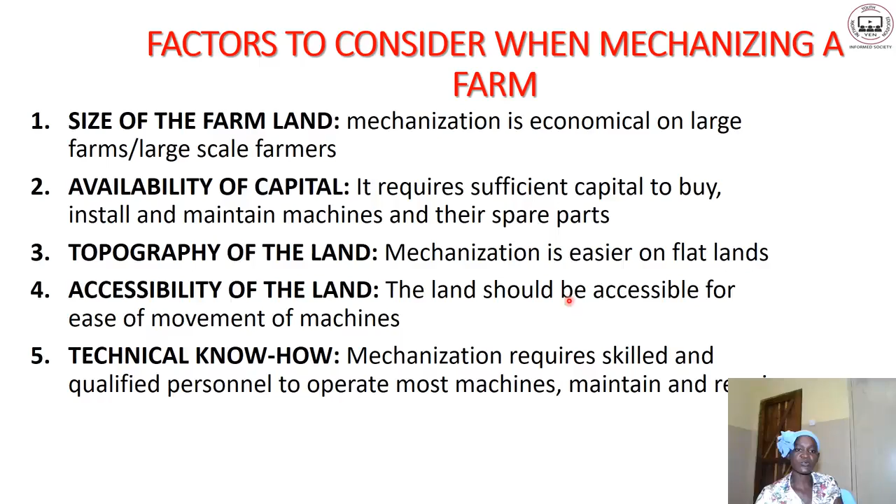may impose things which are not even supposed to be used. So it is very, very important, when you are mechanizing a farm, there is a need for some skills as well as qualified personnel so that they can operate those machines.

Apart from that, value of the crop is also another factor we need to consider. High-value crops can be mechanized since they are able to recover the cost of mechanization. As I've already mentioned, most farm machines are very, very expensive. So you cannot use those expensive machines for activities in an amaranthus field, bonongwe. We know those types of vegetables are very, very cheap when it comes to selling them.

Of course, you may have a huge field, but as long as you are going to plant, let's say, amaranthus, then you hire a machine to clear the land, to till the land or to make some beds, even to plant. Definitely you may not be able to recover the cost of mechanization.

So make sure that if you are going to grow valued crops, you can mechanize, bearing in mind that once you sell your crop, which is of high value, you're going to recover the cost of mechanization. Apart from that, we can also consider market demand.

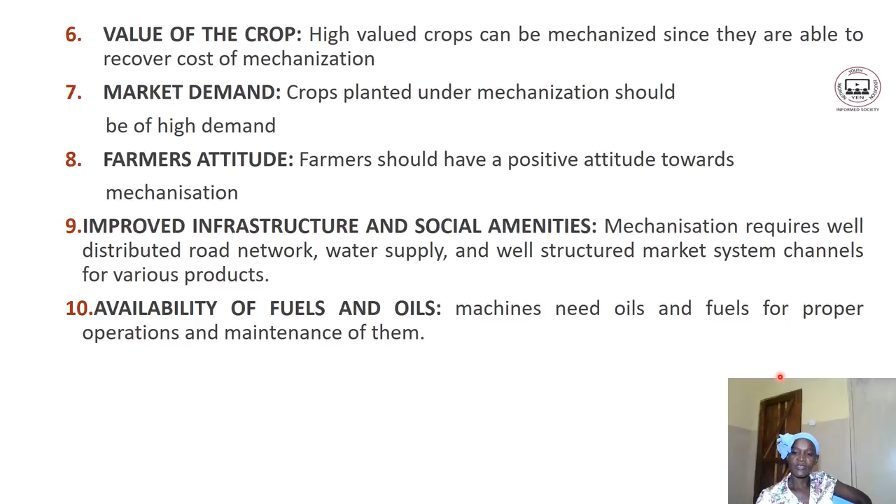Apart from that, it will depend on availability of fuels and oil. For those machines to be used, you need oils and fuels for proper operation and maintenance. You remember at one point in time here in Malawi, we ran out of fuel. It means that at that time mechanization was impossible. So mechanization can be impossible in countries where they run out of fuel, just because those machines cannot be used if there is no fuel.

Then availability of labor is also another factor we can consider. It is very, very important that there is sufficient labor on the farm to perfect the work done by the machines. As I've already mentioned, you need qualified personnel to operate those machines. So if they are not there, it will be impossible to use those machines. So it will depend on the availability of qualified personnel.

Apart from that, it will depend on land tenure system. Some land tenure systems will prevent combining farms to create bigger farm holdings. We have mentioned earlier that in order to mechanize, you make sure that you are mechanizing large farms. And here in Malawi, with this high population increase, we are running short of land. Most of the times, families cultivate on small pieces of land.

But still, we can mechanize as long as we combine those small farms and create a bigger farm or holding, so that each and every farmer may contribute to the cost of the machine if it is hired. But there are some land tenure systems which will prevent doing so. So it will depend on the land tenure system.

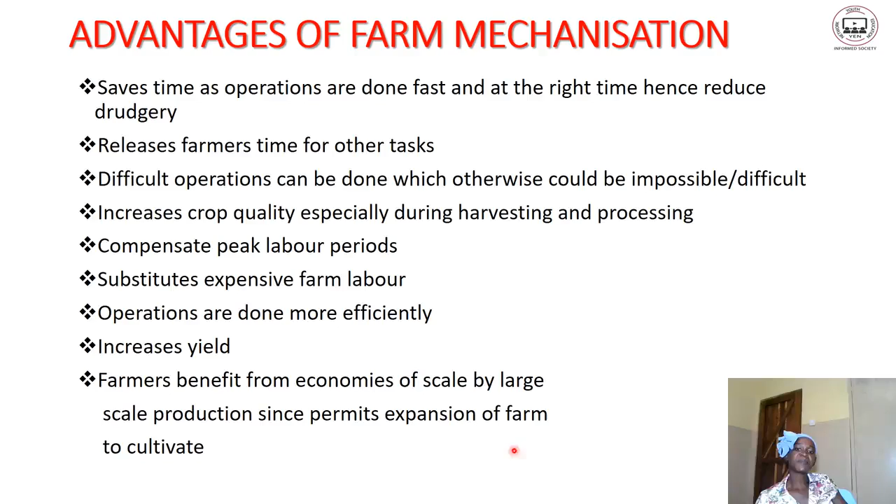Even though farm mechanization has several benefits, it also has some limitations. Some of the disadvantages are as follows. Number one, it creates unemployment. For example, unskilled labor may not be required if you are mechanizing a farm; you only need skilled labor. Therefore, people will be migrating to cities and towns in search of work. So in a farm where you may employ 10 people to do some of the operations, you may only employ one qualified personnel. So in that case, it creates unemployment.

Apart from that, quality of work may be compromised due to speed of operation. Farm mechanization, as already mentioned as an advantage, is very fast. But that speed may compromise the quality of work. And also, capital and operating costs are very high, making it very expensive. So, in short, farm mechanization is very expensive. It requires high capital.

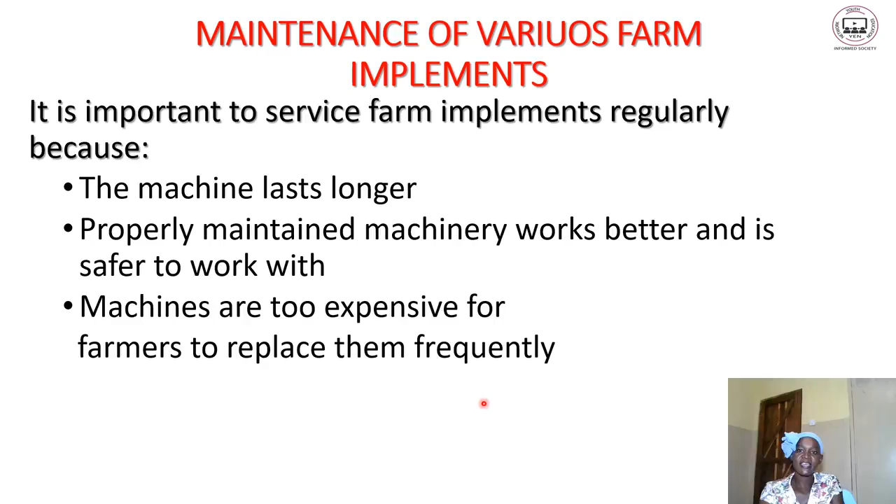The panga: replace, sharpen, and oil the blade if the handle is broken, blunt, or dry. Apart from that, clean the panga after use. The wheelbarrow: grease the wheel axle to reduce wear and tear, and it is important to paint the wheelbarrow to prevent it from rusting.

The sprayer: make sure that you clean and dismantle the nozzle and the tank thoroughly soon after use with clean water to prevent corrosion by chemicals. Painting the knapsack sprayer during the off-season is also essential.

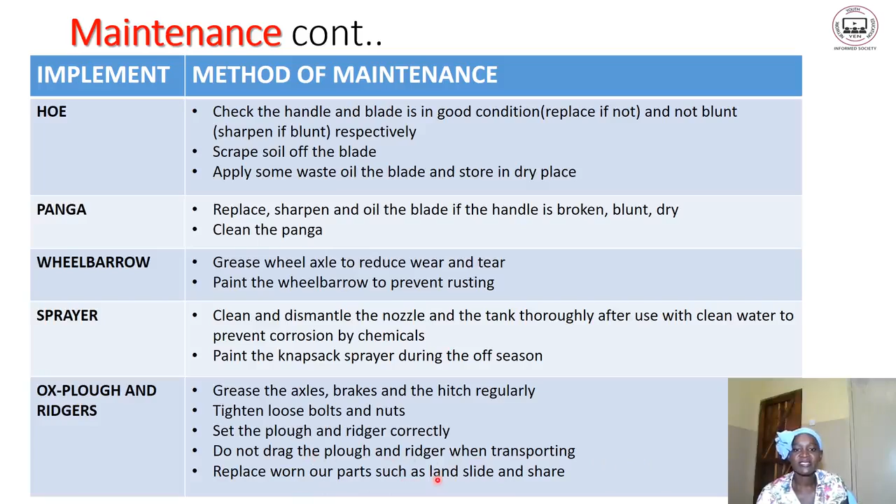The ox plow and the ridger: grease the axles, brakes, and the hitch regularly. Tighten loose bolts and nuts before use. Set the plow and ridger correctly. You should not drag the plow and ridger when transporting. Replace worn-out parts such as the landside and share.

The ox cart: grease the wheel bearings and nuts, tighten loose bolts and nuts, and replace worn-out parts. Make sure that you check the tires are at the correct pressure, and do not overload the ox cart to prevent it from overturning. Make sure you paint the ox cart and store it in a shed to prevent rusting.

The harrows: make sure that you tighten all bolts, U-bolts and nuts, replace worn-out parts, and grease the bearings and the harrow when not in use to prevent it from rusting. Check that the teeth are securely placed and sharpen blunt tines or points. Painting is also necessary to prevent it from rusting.

The disc plow: tighten the bolts and nuts, grease the bearings and paint the beams, replace worn-out discs and scrapers. Make sure that you clean and sharpen the discs and check and adjust the scraper.

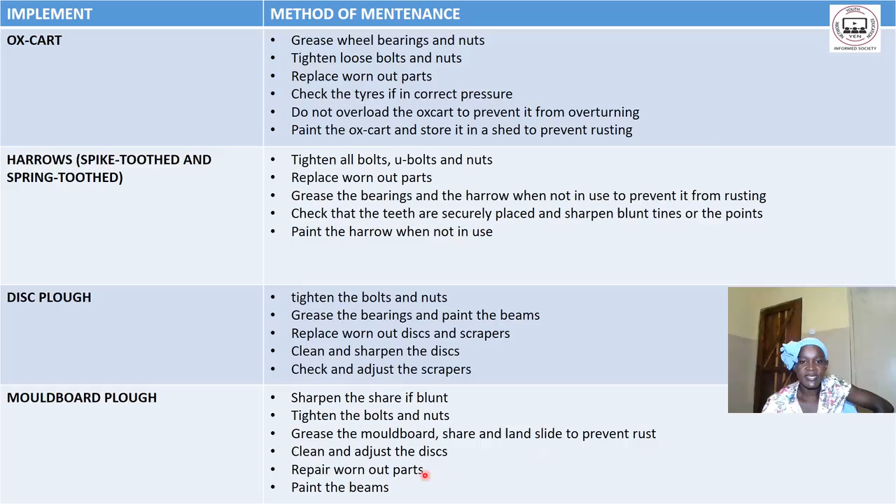Moldboard plow: make sure that you sharpen the share if blunt, and tighten the bolts and nuts. Grease the moldboard, share, and landside to prevent rusting. Clean and adjust as recommended. Repair worn-out parts and also paint the beam.

Some safety measures when using farm machinery should be observed. You should read the operator's manual that accompanies implements and machines before using them, so that you use them as expected. Do not wear loose clothes when operating the machines, otherwise accidents may be inevitable. Do not leave the machines running unattended; make sure that there is qualified personnel near the running machine.

Wear protective clothes such as overalls, masks, gloves, and boots, especially during spraying. Do not smoke, drink, or eat when spraying, otherwise you may consume some chemicals. Avoid spraying against the wind to prevent being splashed with the chemicals. Do not touch the engine when it is hot or running.

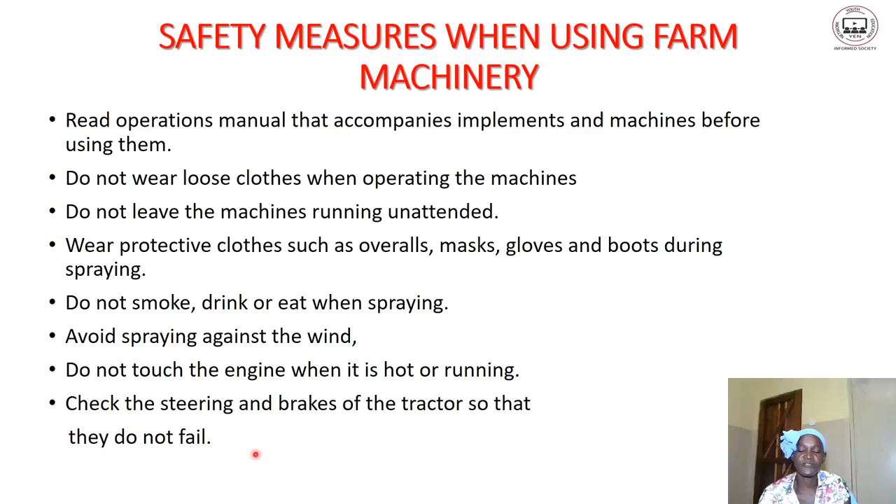Another safety measure: make sure that you check the steering and brakes of the tractor so that they do not fail while in operation. Also, store the chemicals in a safe place, always away from children. Clean the spraying machine thoroughly. Do not use the machine when you are tired, to avoid accidents. Do not remove any part of the machine when it is running.

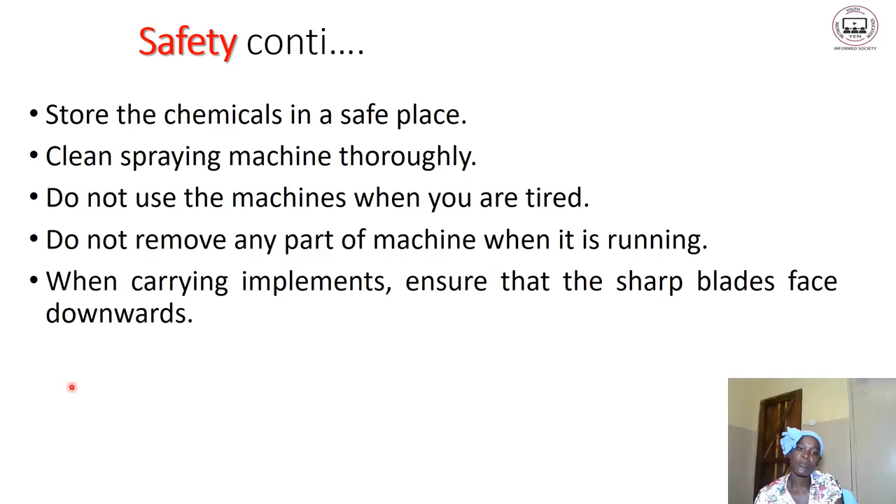Some people, maybe because they are very experienced, tend to remove some parts of the machine while it is running. That is very dangerous. Do not remove any part of the machine when it is running. When carrying implements, ensure that sharp blades face downwards.